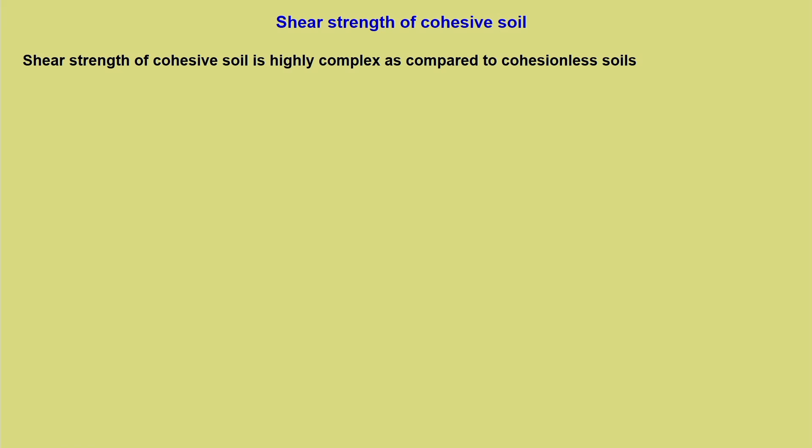Let us start with this introductory remark that shear strength of cohesive soil is highly complex as compared to cohesionless soils. Now, is it really true or not? We will have to see as we proceed.

I would also like to add the statements from a popular book by Taylor, Fundamentals of Soil Mechanics, wherein he states that no physical property of cohesive soil is more complex than the shearing strength. This property depends on many factors, and the individual factors are themselves complicated, but in addition they are interrelated to such a degree that it is extremely difficult to understand their combined action.

What more do we need to know to understand the complexity of shear strength of cohesive soils? You remember I told this sentence in the very beginning of this module, that interpretation of shear strength of soil to some extent lies with the reader himself. So, I am reading certain concepts, I have my own perception of conceiving what shear strength is all about. So, there will be some differences, mainly because of the complexity associated with it.

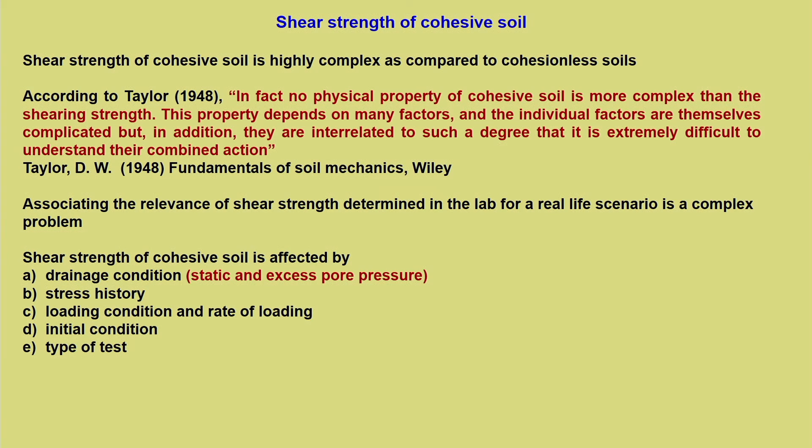As you proceed, by the time you finish the 4th module, you will understand there is a fundamental characteristic of shear strength of soil which you can capitalize on as a fundamental property. Just like direct shear test that we used for explaining shear strength of cohesionless soil, we will use typical triaxial conditions or triaxial testing for cohesive soil, because you need control of 2-3 factors, specifically drainage, pore water pressure measurement, and so on, since these are important factors.

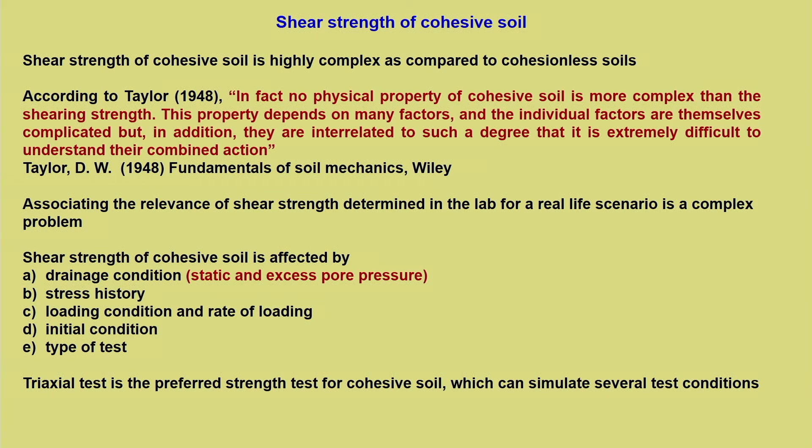So let us first discuss a bit on drainage condition and volume change. Some of these aspects will be quite explicit, and some of you would have understood this well during your undergraduate. This refreshing is only for those who have not understood it well, and there are certain additions also which you may find important for our subsequent modules.

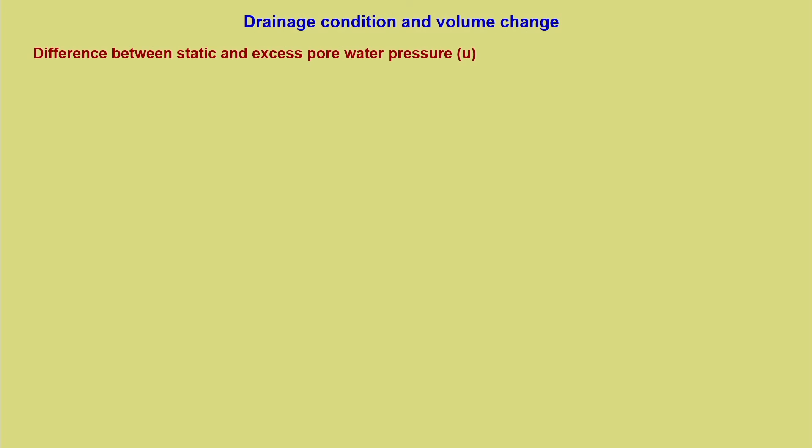So, difference between static and excess pore water pressure. Why is soil mechanics different from other mechanics? It is because of the presence of voids and the relative content of water and air in it. We are talking about only 2-phase systems, saturated systems, so voids are filled with water.

Now, when soil is on its own, with no external loading acting on it, whatever is the pore water pressure, the hydrostatic pressure, we call it static pore water pressure. So this is what it is: we have a soil in place, which is a saturated soil, and Z is the height.

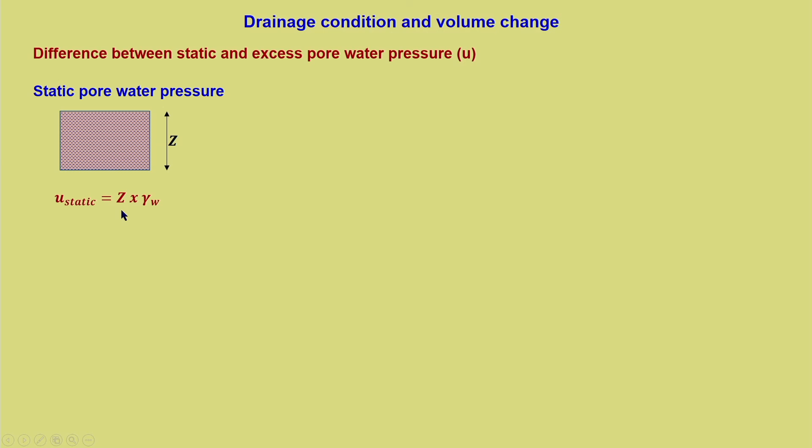So U static, or the static pore water pressure, is Z into gamma W. Understand, this is an equilibrium condition, and this pore water pressure is merely under the self weight of the soil. There is no external loading acting on it, and this is a typical equilibrium condition. That means no flow is taking place, soil is not changing, and whatever is the condition of the soil and the water within, this is under equilibrium condition.

Now, to this equilibrium condition, let us say there is a load acting, delta sigma. This is an external load or increase in total stress. When we say total stress, we understand this is some additional or extra load acting on the soil. So external pressure delta sigma is applied on the soil mass, let us say it is a triaxial loading.

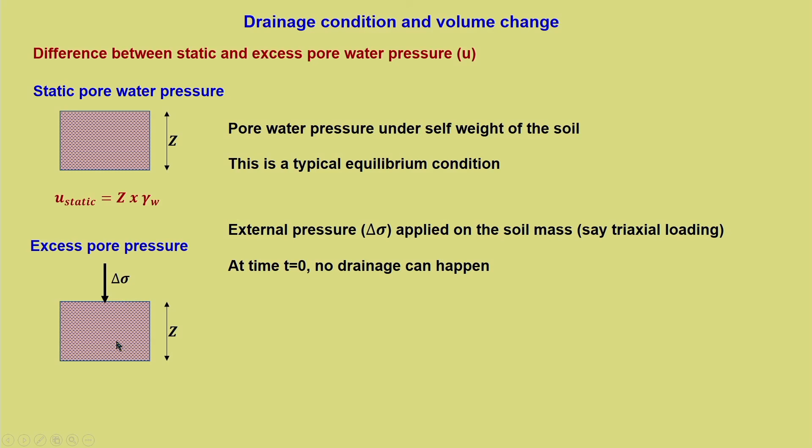Now, at time t equal to 0, there is no drainage that can happen, because this is cohesive soil. So at time t equal to 0, there is no drainage. What is the result of no drainage? There is a build up of pore water pressure and a disequilibrium condition. So delta sigma is entirely taken up by the water, and pore water pressure increases by the same amount of delta sigma at time t equal to 0.

So, the pore pressure from loading is called excess pore water pressure, UXS. This excess pore water pressure makes all the difference in soil behavior with respect to its stress-strain as well as shear strength behavior. We need to understand the difference between what sort of pore water pressure causes changes in soil and what sort influences the shear strength behavior or mechanical behavior of the soil. It is essentially the excess pore water pressure.

And UXS, to start with, when time t equal to 0, is equal to delta sigma, and total pore water pressure will be Z into gamma W, that is the static component plus this additional component.

So what happens to UXS when something is not in equilibrium? If you observe nature, if something is not in equilibrium, it always tries to achieve equilibrium by some means. In the same manner, because there is a disequilibrium under applied load condition, UXS will not exist as it is. It is a transient quantity and there is always a tendency for the soil to dissipate this and reach a new equilibrium condition, so UXS will get dissipated over a period of time.

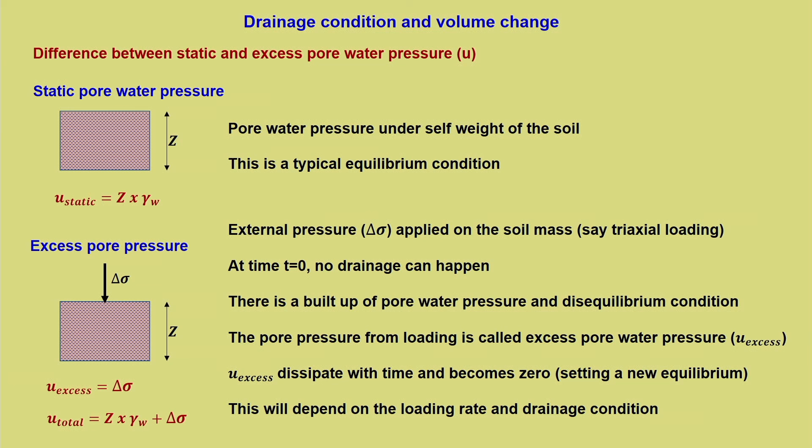Let us say it is an earthquake loading, the whole of the loading is going to be imposed in a very small amount of time, so the build up of pore water pressure will be quite high. Whereas if it is a very staged loading slowly, then pore water pressure may even not develop because it will have sufficient time to dissipate. So this is the two different extremes which we need to keep in mind, and this is going to influence the mechanical behavior of cohesive soil.

So now let us start with undrained condition. Now what is meant by undrained condition? The hydraulic conductivity of cohesive soil is relatively low as compared to cohesionless soil, and it is soil and compaction condition specific - it will depend upon what is the type of soil. A clay soil will be having extremely low hydraulic conductivity as compared to a silty one.

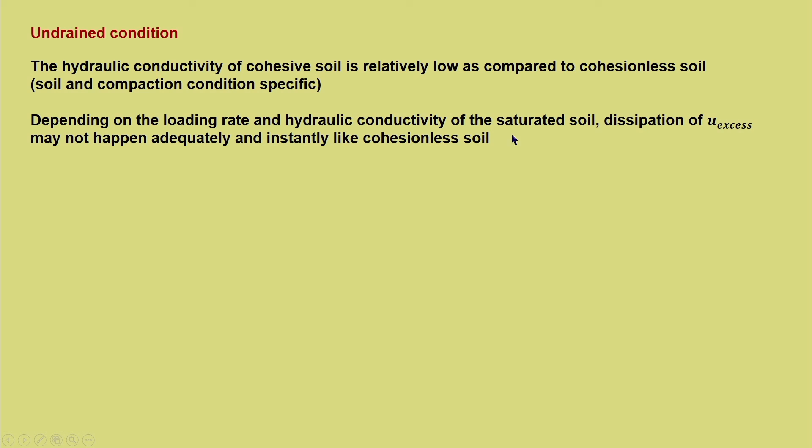Similarly, for the same soil, the compaction state may alter the pore structure. So all this is going to govern what kind of hydraulic conductivity it has. Depending on the loading rate and hydraulic conductivity of the saturated soil, dissipation of u excess may not happen adequately and instantly like cohesionless soil, which means to say u excess is going to remain there, because of the stiffness, water attracts the load and it holds it.

Now only when the water is allowed to move out to expend the energy, then only it will come back to its original state, and when it tries to achieve its new equilibrium state, there will be some changes that will happen to soil, and that is how we say the total stress is transferred to the soil as intergranular stress or effective stress.

Now depending upon a fast loading rate and low hydraulic conductivity, also the access for the water to move out - these three conditions can lead to undrained conditions in soil.

So any volume change - now the question associated with undrained condition is, yes, we understand water is not allowed to move out, u excess will remain there, so what? Now what is the net effect of undrained condition? When we say it is an undrained condition, what should we understand from it?

Now let us say from volume change perspective of the soil. Now during undrained condition, we know that water is not going to move out so fast, then any volume change other than movement of water will be associated with the volume change due to compressibility of the water and or compressibility of the soil solids.

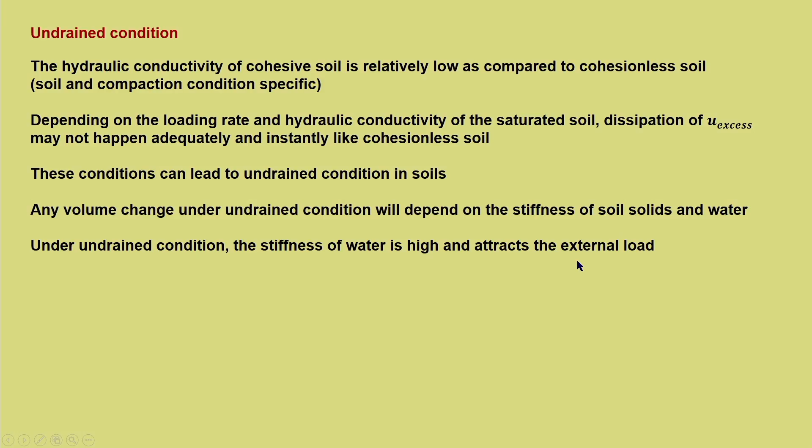So under undrained condition, the stiffness of water is high and it attracts the external load. Since it is undrained, it is not able to move out. So naturally the stiffness of the water will be high and it has the tendency to attract all the load to itself. At the same time, stiffness of soil solids are also high.

So what does this mean? Water is not allowed to move out. Both water and soil compressibility, there is no response or there is no volume change associated with compressibility of water and compressibility of soil solids, which means to say that volumetric strain will be 0 and volume change will be 0 for undrained condition, and Poisson's ratio is equal to 0.5.

Now whenever we hear the term undrained condition, the first thought that should come to us is it is going to be a no volume change condition, and we have already seen this in the previous lecture. When the volumetric strain is 0, the Poisson's ratio turns out to be 0.5. So undrained condition, no volume change, Poisson's ratio equal to 0.5 - these are some of the facts which we need to keep in mind.

Why I am repeating this, why we need to understand this, you will understand its significance as we move forward in the lecture, especially in module 3 and module 4. So basically we are laying foundation for a better understanding to deal with module 3 and module 4.

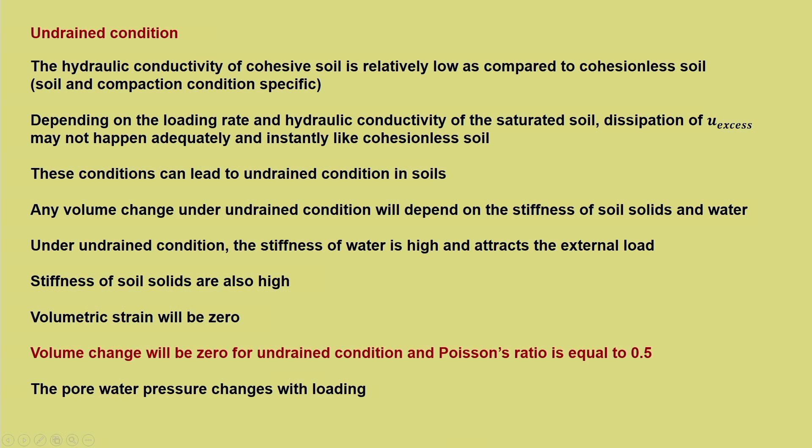So pore water pressure changes with loading - that we have already discussed. Now some thoughts about drained condition, because these facts are important before we actually start understanding the shear strength behavior of cohesive soil.

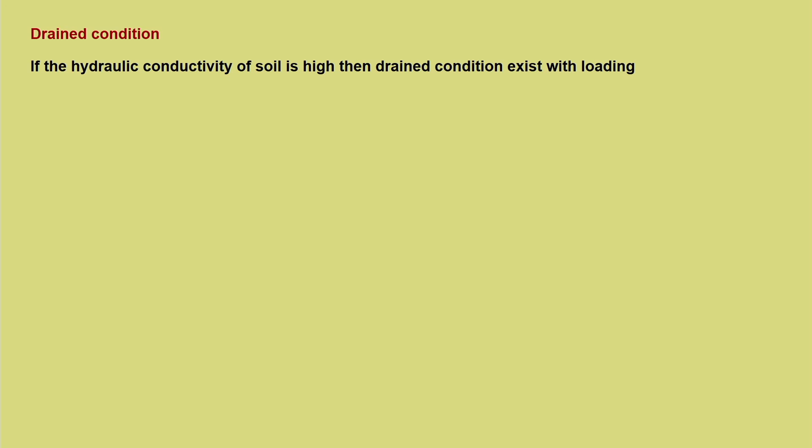If the hydraulic conductivity of soil is high, then drained condition exists with loading, or if there is proper access, venting, or pathway for water to move out of the cohesive soil. If the loading rate is very low and the hydraulic conductivity is fairly good or high, then the excess pore pressure may get dissipated fast. Such a condition is called drained condition, where drainage of pore water is possible. If the loading rate is less, there is enough time for dissipation of excess pore pressure even for a low hydraulic conductivity case. These conditions can lead to drained condition in soils.

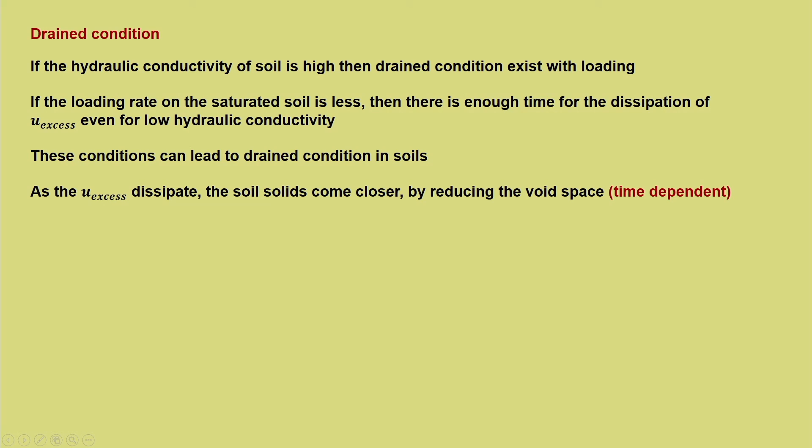As the excess pore water pressure dissipates, what is the net result? When the water moves out, the soil solids will try to come closer, the packing is better. So whatever stress the water had carried before dissipating gets transferred to the soil solids along their points of contact, and that is what is intergranular stress. Any loss in pore water pressure is the gain in intergranular or effective stress.

So it comes closer by reducing the void space. This is a very important aspect. Such a process is time dependent, and that adds complexity to the behavior of cohesive soil, whereas in the case of cohesionless soil, it is an instant response and drainage is also more or less instant. So you do not have to wait to see its final response, but that is not the case with cohesive soil. It is time dependent, and in what manner, we do not have any clue at the beginning. It depends entirely on the soil characteristics.

This causes consolidation, which we know. Consolidation leads to progressive densification, and this is known as yielding, which is nothing but plastic adjustments or readjustments in an initially loose saturated soil deposit. I have added 'loose saturated soil deposit' specifically because only loose soil will densify. So that is very important. You need to understand that it undergoes consolidation. Consolidation is a process of densification for loose samples, and when it happens, this is an elastoplastic response. There will be a kind of yielding that happens to the soil and plastic adjustment of particles.

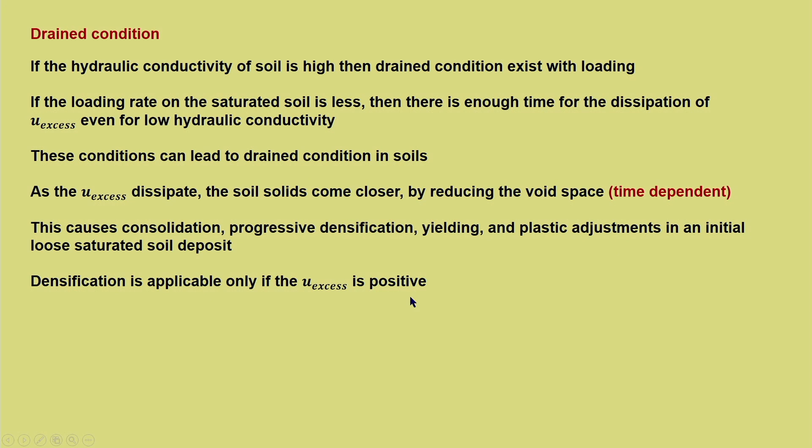Densification is applicable only if excess pore pressure is positive. Yes, only positive pressure leads to densification. If it is not, what is the other case? Excess pore pressure can be negative, we will see that later. But densification is possible when it is loose. In loose soil, excess pore pressure will be positive, and that dissipation causes densification.

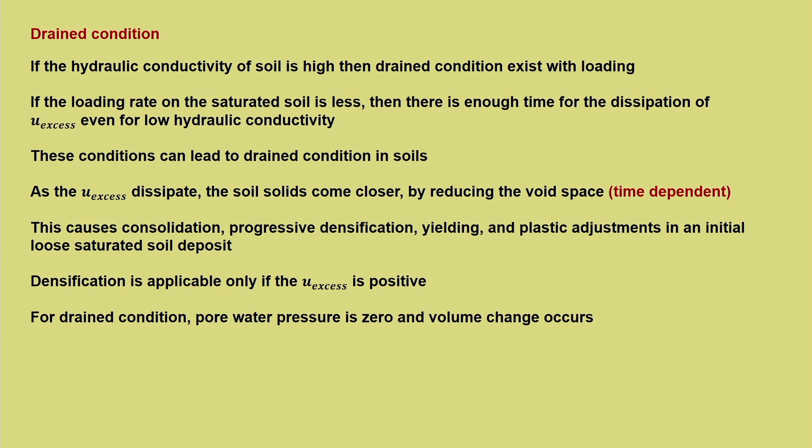For drained condition, pore pressure is 0 and volume change occurs. This is another important fact to keep in mind. When the condition is assumed to be drained, there is no pore pressure development and volume change happens. When we know it is undrained, pore pressure develops and volume change is 0. These are the two important aspects which influence the soil behavior.

But in actual field condition, this will be a combination. We cannot exactly have a clear drained condition or a very specific undrained condition. This aspect we are talking about with respect to the laboratory tests we are conducting, because we have proper control of drainage, but in the field this will not be the case, and there will be a combination of both conditions. That is where we started off saying how good a laboratory test translates to actual field condition.

So volume change characteristics need some more discussion. Volume change in cohesive soil is a time dependent process because dissipation of excess pore pressure is governed by drainage outlet and hydraulic conductivity. Volume change characteristics of cohesive soil are represented in terms of void ratio and log of consolidation pressure, which is the net result of a consolidation test.

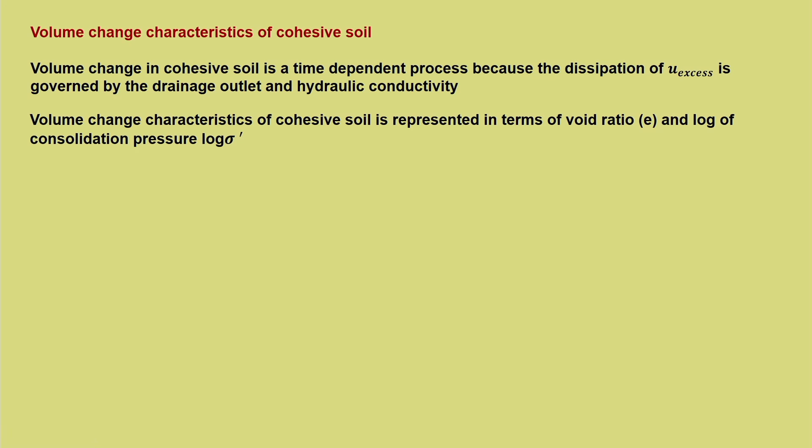So this is what it is. There is a response between void ratio e and log sigma dash, the consolidation pressure, which is an idealized consolidation behavior. So volume change characteristics can be described by 1D consolidation, this is one dimensional consolidation result, or it can be due to isotropic consolidation, which we can carry out in a triaxial testing under the consolidation that happens under all round stress condition.

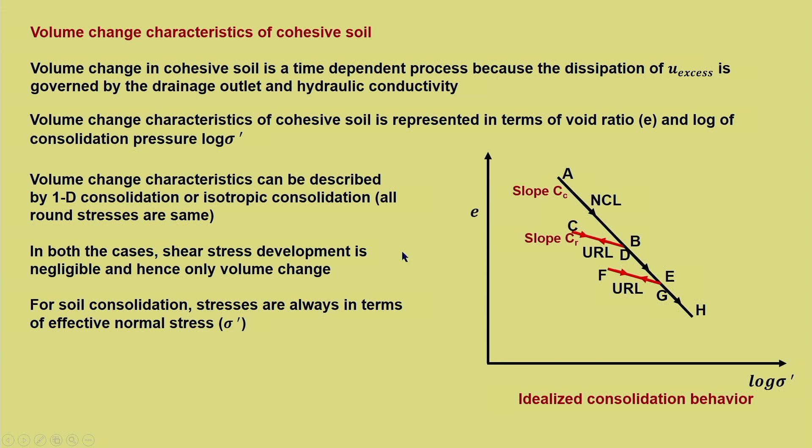In both cases, shear stress development is negligible, hence we are talking only about volume change behavior. Because of infinite rigidity, or in the case of isotropic consolidation, all round stresses are same, so there is no possibility of development of shear stress. We are basically understanding volume change behavior specifically, the way we discussed in module 1, like no shearing, only volume change.

For soil consolidation, stresses are always in terms of effective normal stress. The second statement of the effective stress principle says that all compressibility behavior is entirely governed by the effective stress.

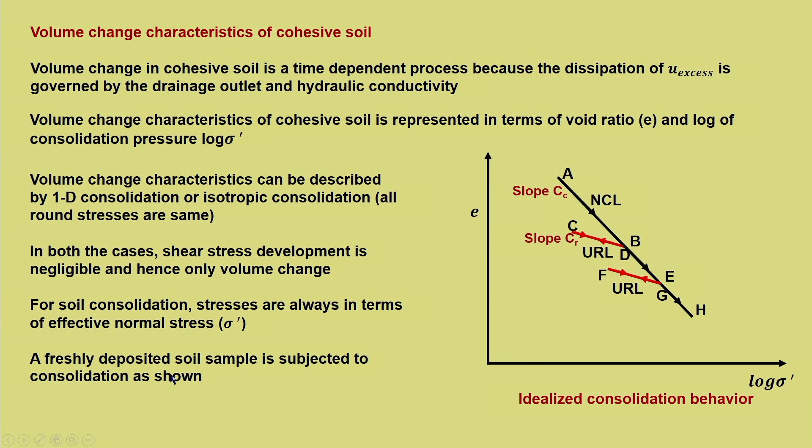Let us say a freshly deposited soil is subjected to consolidation as shown. Line AH is known as the virgin consolidation line or normal consolidation line, NCL, and it has a slope of Cc, which is known as the compression index. Why this is called the virgin consolidation line, I hope you would have understood during your UG, because any stress on this AH is for the first time the soil is experiencing. That is the reason why it is called the virgin consolidation line, and very popularly known as the normal consolidation line.

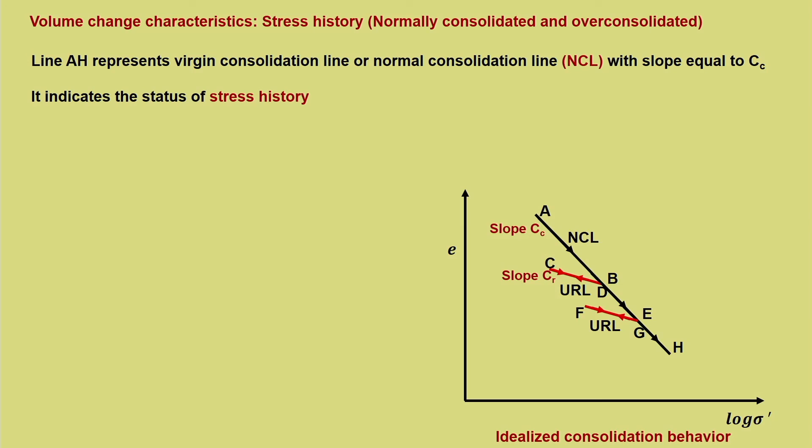This whole response, the consolidation response, indicates the status of stress history. Now let us say you have a soil from the field, subjected to stress consolidation. How it gives its response will depend upon what stress history it has been subjected to. History means what kind of memory the soil holds, whether it has been subjected to a higher stress or a lower stress. We will understand this from the response.

Normal consolidation indicates that the soil has not been subjected to this stress in the past. We have already seen that. The volume change behavior is steep and considerable plastic rearrangement happens. So this is another important fact to keep in mind: a normally consolidated soil undergoes high volume change because it is experiencing that stress for the first time.

When it is overloaded before, it will have better stiffness, and this is a very important philosophy. When you experience more stress in the past, it makes you more strong. It is the same philosophy that soil also exhibits. So when it is experiencing stress for the first time, it will have less resilience to it, and that is why it undergoes a very high plastic rearrangement.

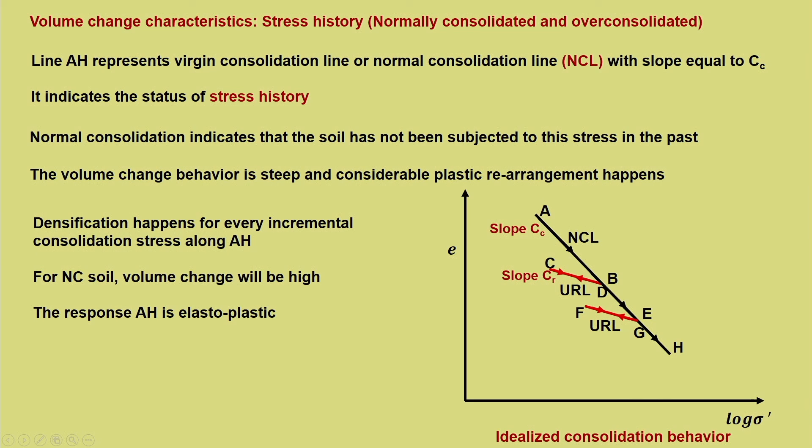Densification happens for every incremental consolidation stress along AH. So we are talking only about the NCL. For NC soil, volume change will be high, and the response AH is elastoplastic. So a normally consolidated soil undergoes an elastoplastic response.

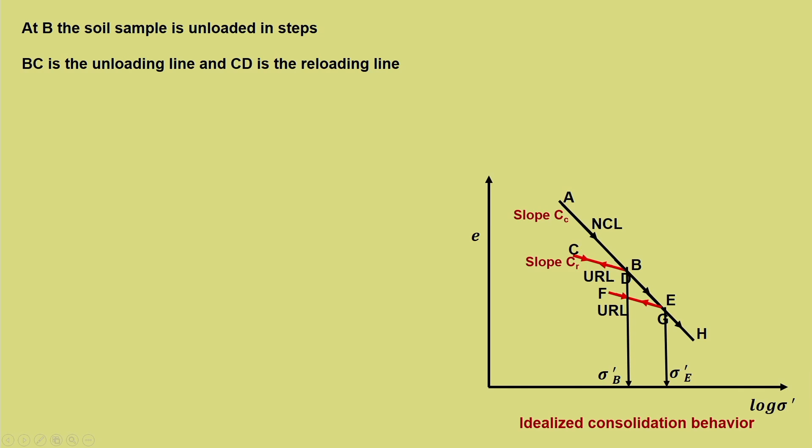Now let us say that at B the soil is unloaded, and it is unloaded in steps. BC is the unloading line and CD is the reloading line, so it is an unloading-reloading line. The slope of this unloading-reloading line, also called the recompression line, is mild and is represented by CR, which is much less than CC.

Now the gain in void ratio, whatever void ratio it gains, is also less because this much densification has already happened. There will be some amount which it gains, and that is the elastic component which we have already seen in module 1. CR is less than CC.

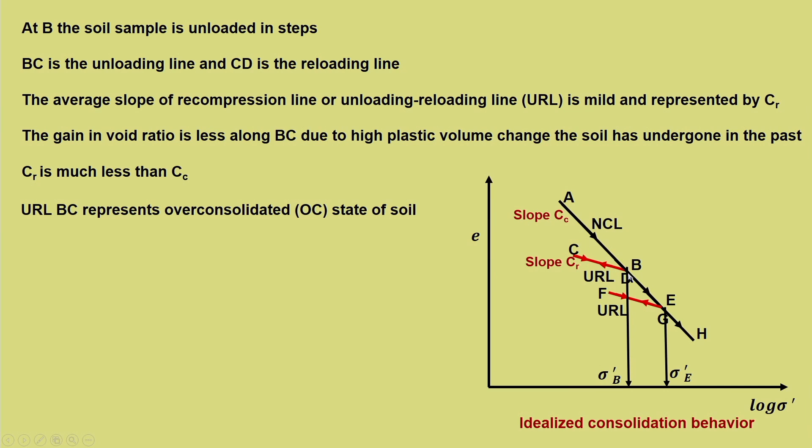Now the unloading-reloading line BC, this particular stretch of response, represents the over-consolidated state of soil. Why is it over-consolidated? At this particular point it has been unloaded. If you consider any stress state along this line BC, this stress state is less than what it has been subjected to in the past, that is sigma dash B is the stress which it has been subjected to.

Because of this, BC is more stiff till it reaches sigma dash B, because it has already been subjected in the past to sigma dash B, and the soil knows that it can withstand sigma dash B. So up to sigma dash B, any stress less than that, the soil can take without any issue. So it exhibits a kind of elastic response, and void ratio changes are less.

So if you load along CB, the change in void ratio is not going to step down steeply like this. It is not going to go that route if you start loading from C, it will still go along CB.

So why? Because it has already reached a stiff state, and hence it will exhibit an elastic response. So void ratio changes are very less. So consolidation stress at B, sigma dash B, is then known as the pre-consolidation pressure for the soil state along BC, and this we have seen during UG classes.

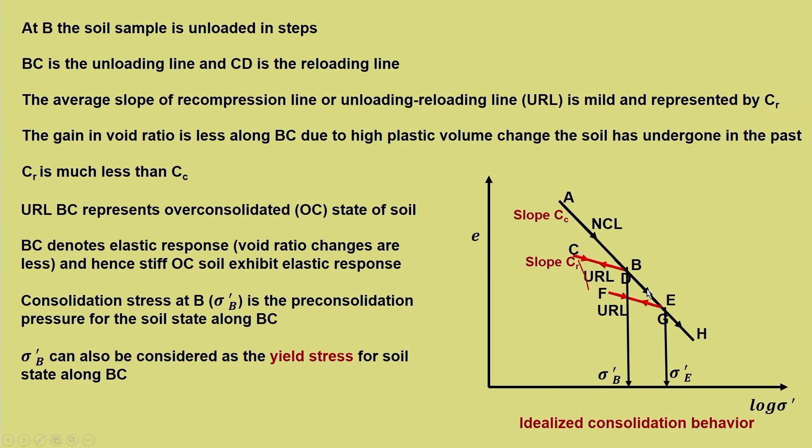What additional we need to understand about pre-consolidation pressure is that sigma dash B can also be considered as the yield stress for soil state along BC. So when the soil is loaded from C to D, it will exhibit elastic behavior till D because the yield stress is at sigma dash B.

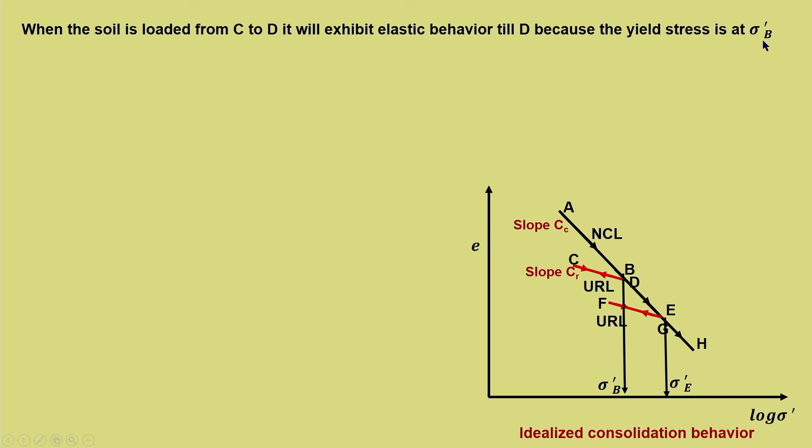So that is an important aspect which is very important for module 4. So up to sigma dash B, since the yielding has not occurred, it will exhibit a kind of elastic response. The moment it crosses point D, once the reloading reaches D, again the yielding happens and soil will further undergo elastoplastic response along DH, showing the same elastoplastic response.

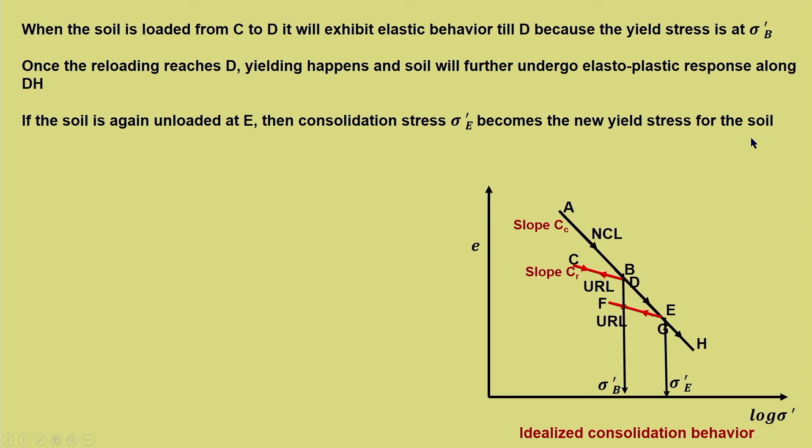If the soil is unloaded at E, now there is a new yield stress, the pre-consolidation stress. Then consolidation stress sigma dash E becomes the new yield stress for the soil. So then the question arises, what happened to the previous yield stress sigma dash B?

So that is what we told, soil keeps things in memory, but it gets erased also when the new loading comes. That is what has happened. From D to E, again some plastic rearrangement happened. So from E if you unload, the new yield stress for that particular soil is sigma dash E.

So yield stress is not constant and changes depending on the loading, that is stress history. This we need to keep in mind, unlike other materials, yield stress in soil keeps changing and it depends upon the previous loading or the stress history. The stress state on EF is over consolidated and it behaves elastically similar to BCD.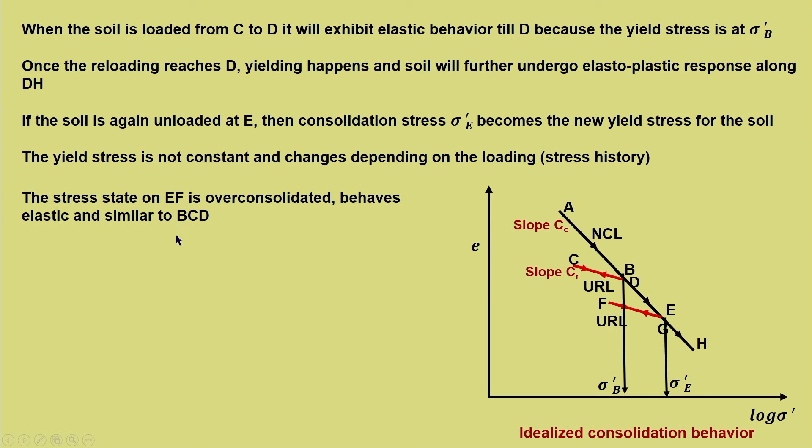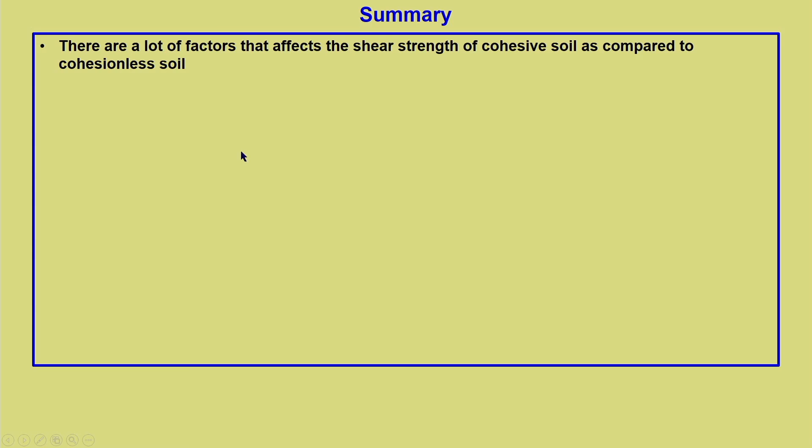To summarize, there are a lot of factors that affect the shear strength of cohesive soil as compared to cohesionless soil. Presence of pore water pressure, its dissipation affects shear strength and is governed by soil hydraulic conductivity. For undrained condition, volume change is 0 and pore water pressure exists.

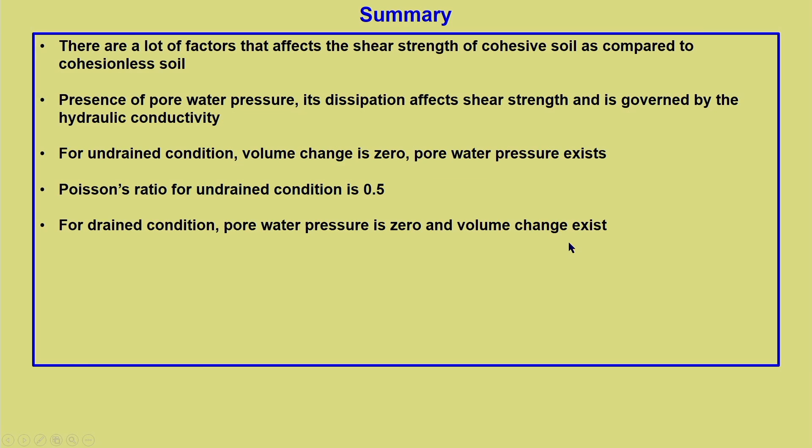Poisson's ratio for undrained condition is 0.5. For drained condition, pore water pressure is 0 and volume change exists. Volume change governs the stress history of soil, normal and over consolidated condition.

So volume change governs the stress history of soil, to how much it has been subjected to in the past. Normally consolidated state undergoes high volume change and exhibits elastoplastic behavior, and an over consolidated state exhibits minimal volume change and exhibits elastic response.

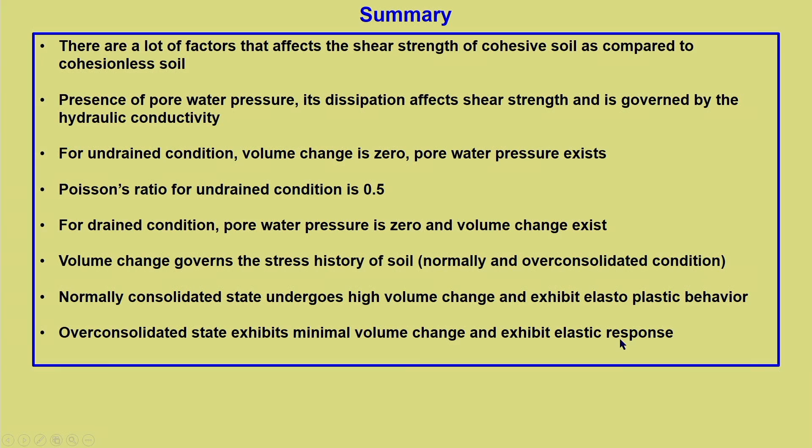That is why in certain construction, if we know that the soil is heavily over consolidated, we do not have to bother too much about its settlement, because it will be mostly in elastic limit. The moment the load acting on that soil exceeds its pre-consolidation pressure, then the settlement will be more.

Over consolidated soil has already undergone high stress in the past, which is plastic rearrangement. So our over consolidated soil exhibits less volume change till it reaches the maximum past stress, which is the pre-consolidation stress. Over consolidated soil exhibits elastic behavior due to less volume change.

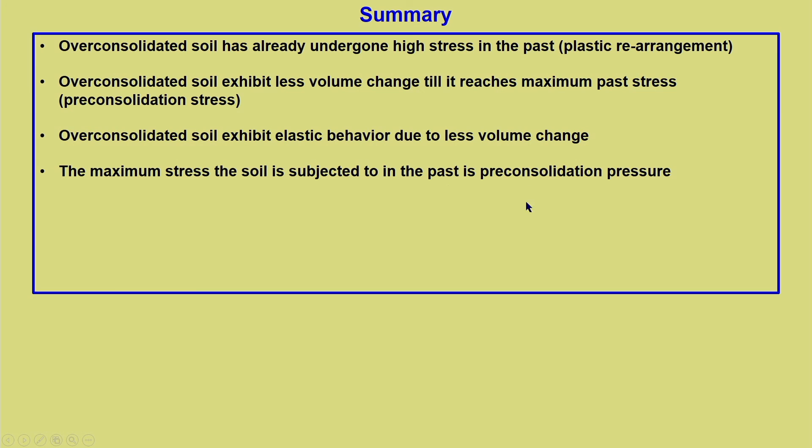The maximum stress the soil is subjected to in the past is called pre-consolidation pressure. Pre-consolidation pressure is also known as yield stress. Yield stress is not fixed for a given soil, and yield stress changes and is equal to the maximum stress the soil is subjected to in the past.

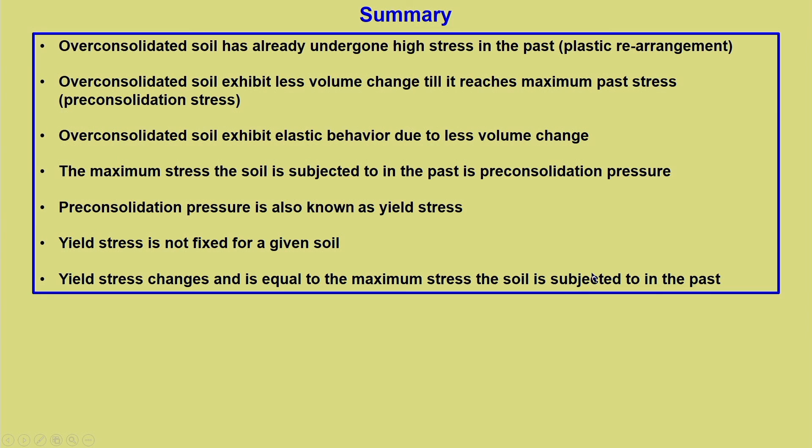So that is all about this lecture. We have discussed basically two important aspects that govern the shear strength of the soil, that is drained and undrained characteristics. A lot more is going to come in the similar lines related to undrained characteristics as well as drained characteristics.

We will see that as we proceed in the lecture. So in the next lecture we will see, because of this, how the stress strain response of cohesive soil behaves. We have completed the first part of shear strength of cohesive soil. We will now see the stress strain response and the shear strength the way we have seen for granular soil. So that is all for now. Thank you.